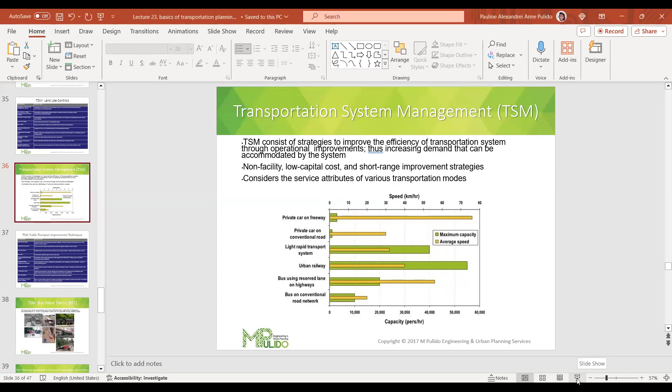I'll share my PowerPoint. Okay, so be here. So I think this was the last slide, this is the next slide, regarding TSM. So bibilisan ko na siya. Um, okay.

Transportation System Management has a focus on improving the efficiency of the existing transport network without requiring major capital investments or building new infrastructure. I mentioned this earlier, last meeting. The strategies under TSM are typically operational in nature, aiming to make better use of what's already available, and that's why it's linked to investments that don't really require so much investment.

These are non-facility measures, meaning they don't rely on constructing new roads or rail lines. Instead, they involve low cost and short range improvements, such as optimizing signal timings, improving traffic flow through better lane assignments. It also involves prioritizing high occupancy vehicles and adjusting bus routes for efficiency. The main idea is to address congestion and improve mobility by managing demand and maximizing capacity. For example, adjusting signal timing can improve throughput at intersections, while dedicated lanes for buses or high occupancy vehicles (HOVs) can reduce travel time and encourage mode shift.

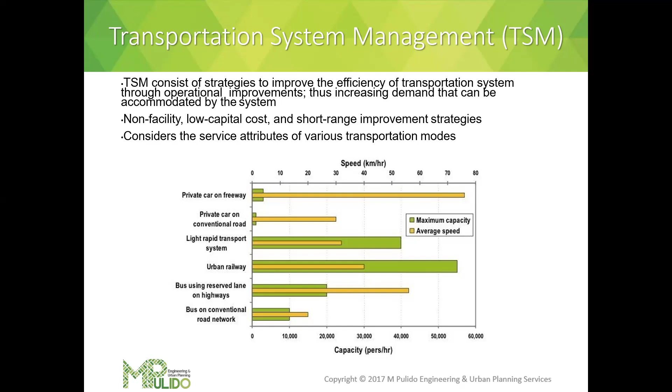You can see a chart here which includes two important performance attributes: speed and capacity. This graph explains that private vehicles on freeways can travel fast, but they carry very few people, making them inefficient from a capacity standpoint. In contrast, urban rail systems and light rail, light rapid transit, offer much higher passenger capacity per hour, even though their speeds may be moderate. Then buses using reserve lanes strike a good balance, offering relatively high capacity and competitive speeds when not mixed with general traffic, and so forth.

Then I can proceed here. This is public transport improvement techniques, so we have a lot here under TSM. So did we finish this before, Jen, or hindi? Tama lang ba? Tama lang po, ma'am.

Okay, so improving public transportation is essential for making mass transit a viable alternative to private car use. The strategies under TSM for public transport improvement focus on enhancing the efficiency, reliability, and user experience of existing systems without the need for heavy infrastructure investments.

So we go first with with-flow bus lanes. It's a concept - with-flow bus lanes are dedicated lanes that run in the same direction as traffic flow. They help improve bus travel speed and reliability by shielding buses from congestion. This makes bus services more predictable and attractive to commuters.

Also, contraflow bus lanes are designated lanes for buses running in the opposite direction of general traffic. These are often implemented in one-way street systems to maintain two-way bus operations without requiring major changes in road layout. Then we also have bus-only streets - this technique limits access exclusively to buses and in some cases pedestrians. This is common in dense city centers to ensure uninterrupted bus movement while promoting walkability.

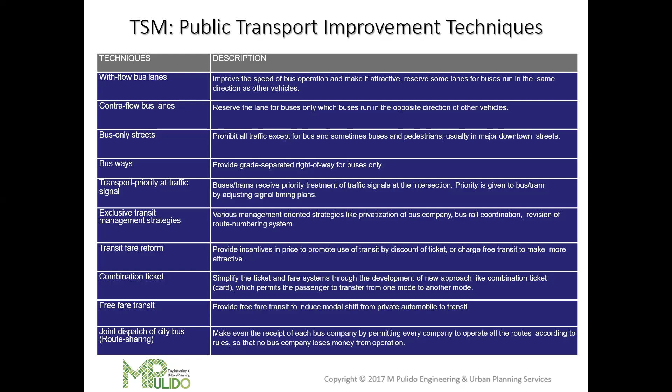Still under TSM, it's the Bus Rapid Transit or BRT. It's a high capacity, high efficiency public transport option designed to deliver metro level service using buses. It's built on the principle of dedicated infrastructure, usually lanes or corridors reserved exclusively for buses, often with platform level boarding and off-board fare collection to speed up operations.

Compared to light rail systems, BRTs are generally more cost-effective to implement. They require less infrastructure investment because they use rubber-tired vehicles and can operate on existing roadways. So those are the practical reasons, with minimal modification.

However, for BRTs to function efficiently, two conditions must be met. First, dedicated lanes must be enforced, free from interference by private vehicles. Second, other competing bus services must be managed or rerouted to avoid undermining the BRT system's reliability and speed advantage.

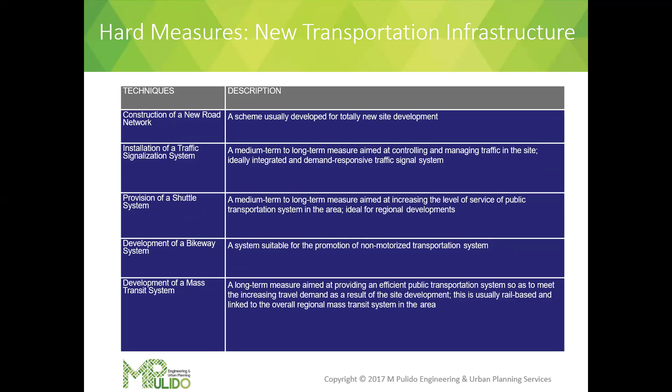So I can see also there, road widening. Okay, this was what I was trying to tell kanina, nauna. Nauna kaysa dyan, sorry, iba yung napindot ko. Yan yung ina-explain ko kanina.

And then there are also improving existing transportation infrastructure, road widening, road pavement, rehabilitation of existing traffic control system intersection. So you can check on this. These are all easy to remember.

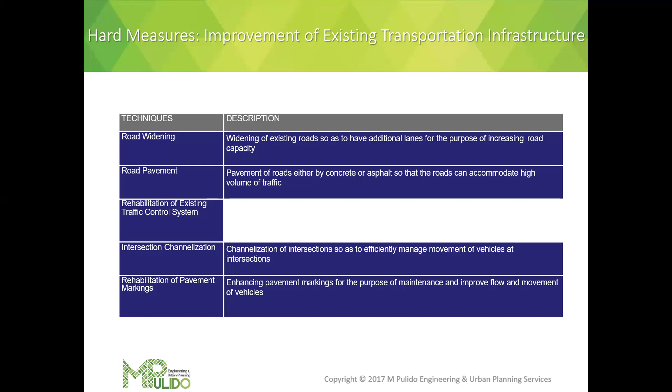Okay, now for policy instruments, there are policy instruments that support and regulate transport infrastructure. HLURB now provided these standards for transport infrastructure. They set the minimum requirements for right of way or road rights of way, sidewalk widths. Di ba nakuha na natin ito nung BP 220 tsaka 957? And also bike lanes, also standard for that, and then hierarchy of streets in residential subdivisions and mixed-use developments.

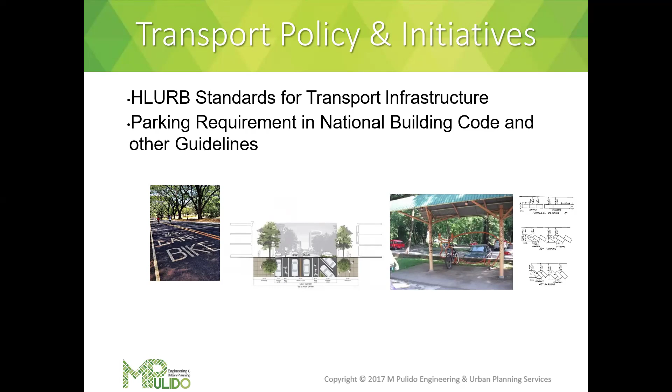These standards ensure connectivity, safety, and proper integration of transport and land use. So we look into parking requirement in National Building Code and other guidelines. Meron ito, i-check na lang natin yung different standards.

Titingnan natin later if there are some updates. Because here, I mentioned about transport policy and initiatives. So ano ba yung mga andyan?

May update, like DHSUD and DOTr, 2023 yata yun. These agencies signed an agreement to integrate land use and transport planning, and it focuses on relocation and resettlement for communities affected by transport projects.

So that's one, and then TOD areas in conjunction with LGUs. That's another collaboration between the two agencies, also ensuring integrated land use and transport planning for new estates and town development.

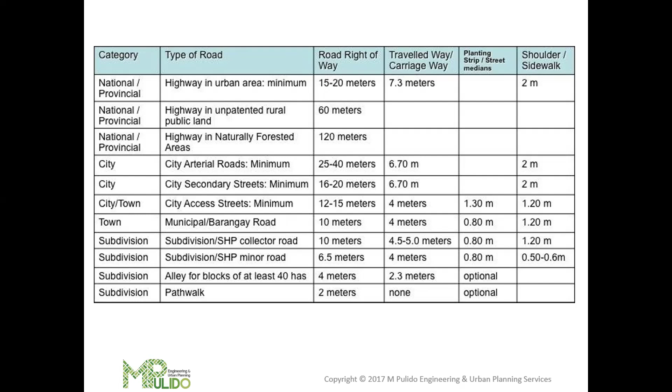For example, it says that low income single detached living units on lots not exceeding 100 square meters require pooled parking at a ratio of 1 slot per 10 units. Ganon. Tingnan ko nga, asan na ba yan?

Okay, then multifamily, with an average floor area of 50 square meters, necessitate one parking slot per 8. Per tama, 8, yan ma'am.

Yan yung padin ginagamit namin sa condo, ma'am. I see, design, wala pa siyang update or anything? Wala pa, ma'am, yan din ang ginagamit pa rin. Okay, yeah, hotels, how about the hotels?

That one parking slot per 10 rooms, parang ganun. Yan pa din? Based on, ma'am, ganyan pa rin eh. Sa resorts, ganyan pa rin ang gamit namin. May mga ano lang like Antipolo, gusto nila 1:1.

Oo, that's parang dapat 1:1 talaga kasi hindi naman siya malayo siya. So everyone, I mean, has car, di ba? And so 1:1 talaga yung siguro yung mga 5-star hotels, no?

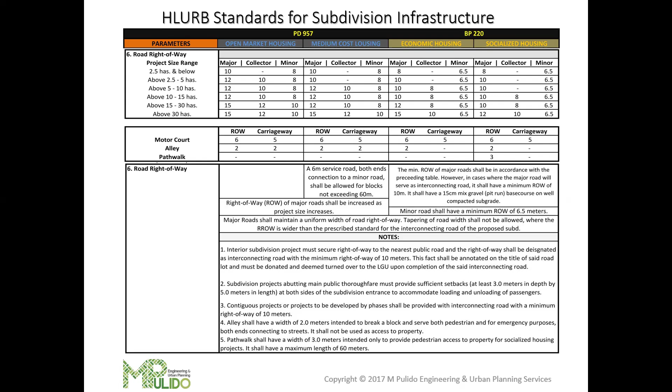So why this matters? These standards are not arbitrary, they're essential for ensuring connectivity, accessibility, safety, and future utility upgrades. In our CLUPs and CDPs, these are minimum thresholds we must observe, and they serve as baseline for negotiations with developers during subdivision planning and approval processes. So here, the planting strips - tapos na natin ito - and sidewalk widths.

So, tapos na natin yan. And then pavement material standards that apply across all road types—major, minor, motor courts, alleys, sidewalks.

The choice of materials is guided by functional needs and cost. PD 957 allows either concrete or asphalt for all road types, including alleys and sidewalks, while BP 220 uses macadam, a less costly gravel-based pavement for sidewalks, alleys, and motor courts to keep development affordable.

As to minimum pavement requirements to ensure durability, concrete pavement must be at least 150 mm thick with minimum compressive strength of 20.7 megapascals. Asphalt roads must be 50 mm thick, supported by the same compressive strength.

For non-engineers and physical planning practitioners, this might be a bit—what's the opposite of a no-brainer? For engineers, of course, this is already well known, especially for Jumel and others who already know about this. For example, sidewalk pavements must reach 17.2 megapascals in compressive strength.

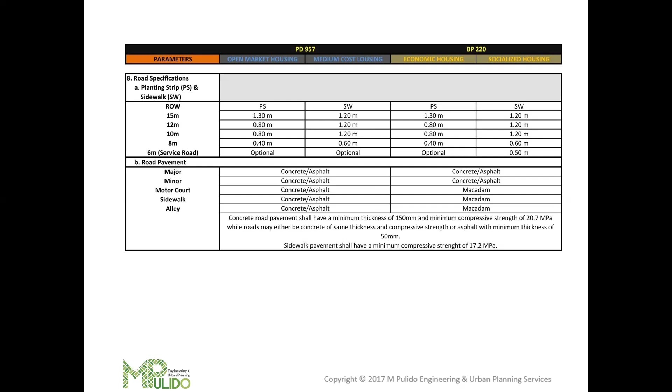So these standards help ensure the roads remain serviceable over time, despite varying soil conditions and daily vehicle loads. Let's see this—natapos na natin yan.

So now let's move to recent updates, for example the DHSUD and the DILG updates. Do you think that's the latest, or is there something I'm missing?

The DHSUD, along with the DILG, has begun aligning transport infrastructure standards with climate resilience and active mobility goals. This means new developments must now factor in walkability, bikeability, and safety, especially in urbanizing areas.

They've also started integrating the complete streets approach. Remember complete streets? It's a concept and framework that ensures roads are designed for all users, not just cars—this includes pedestrians, cyclists, public transport riders, children, seniors, and PWDs. So it's now expected that planners will consider universal design principles in street layouts.